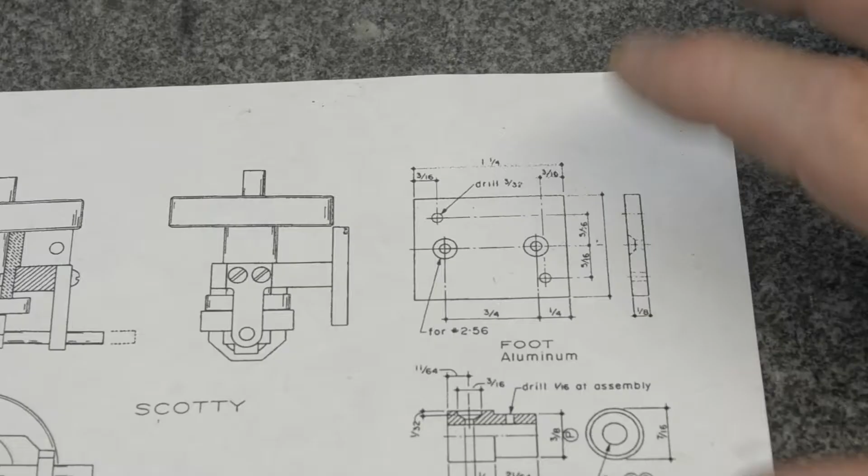Work on a little quickie here right now. Going to work on the foot. Pretty straightforward, simple piece of flat aluminum stock, 1/8 inch thick, 1 by 1 1/4 long. 4 holes, 2 of which got a slight countersink to accommodate a 2-56 flathead screw.

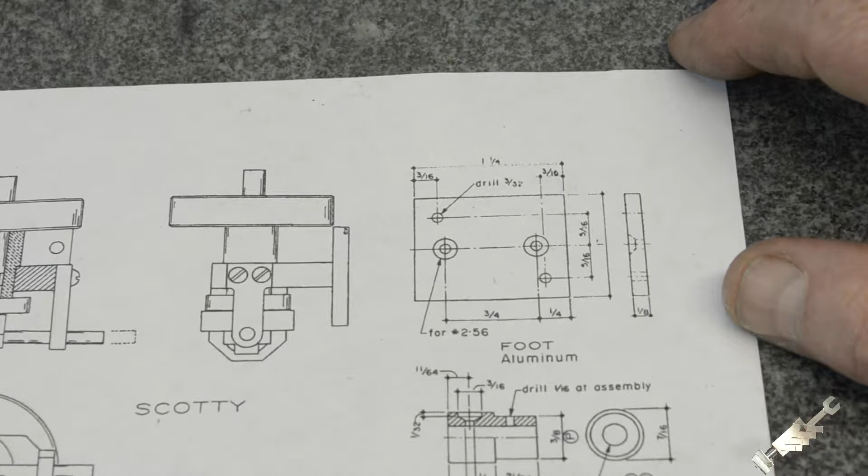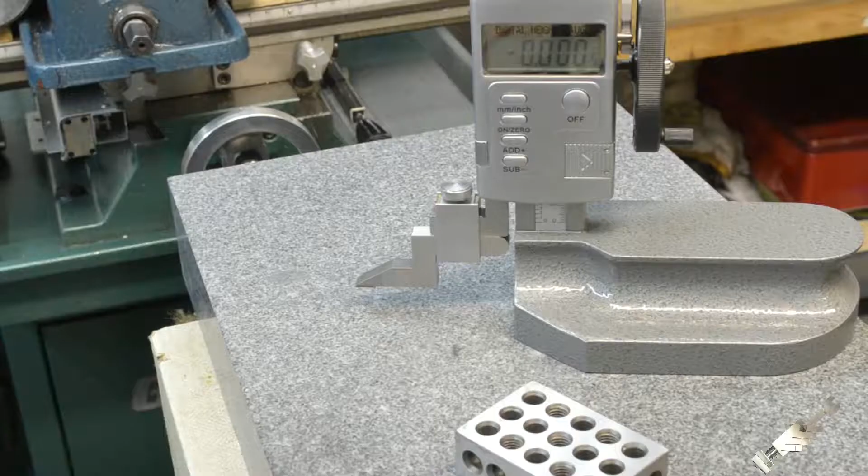And pretty simple. I'm going to lay it out with my digital height gauge, and figure it's good practice since I just got it. And so we'll get moving on this. Okay, so we're going to use my new digital height gauge to lay out the holes and the overall dimensions of the foot, which will fasten the engine frame down to a wooden base of some sort.

So before we do that, we got to make sure that it's zeroed out. So I got my surface plate nice and clean. Made sure there was no grit or dirt on the base of my height gauge. And so it's nice and clean. So let's start by zeroing it out, and you could double check it. Just got a 1-2-3 block here, and as you can see, 1 inch.

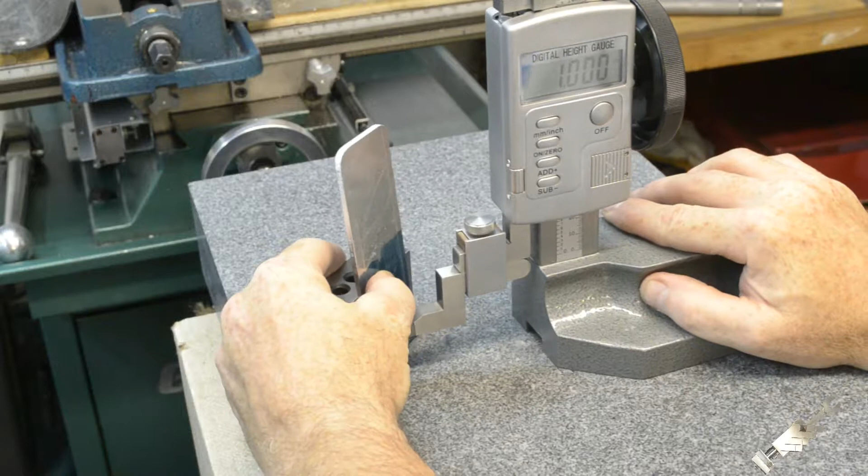So alright, we'll go ahead and I'll get my piece of material and we'll start laying out all the needed dimensions. So 1 inch. So you guys can see what I'm doing. So this will be the length of it there, and then it's going to be a length of 1 1/4. I hope I can keep this in focus here. 1.250.

It's hard doing this with one hand. Okay. And bring this back down. .250. Okay, and this here. Okay, so that'll be the overall dimensions. You gotta draw 2 holes that are on center. That'll fasten the frame to this foot. So that would be 1/2 inch. Okay.

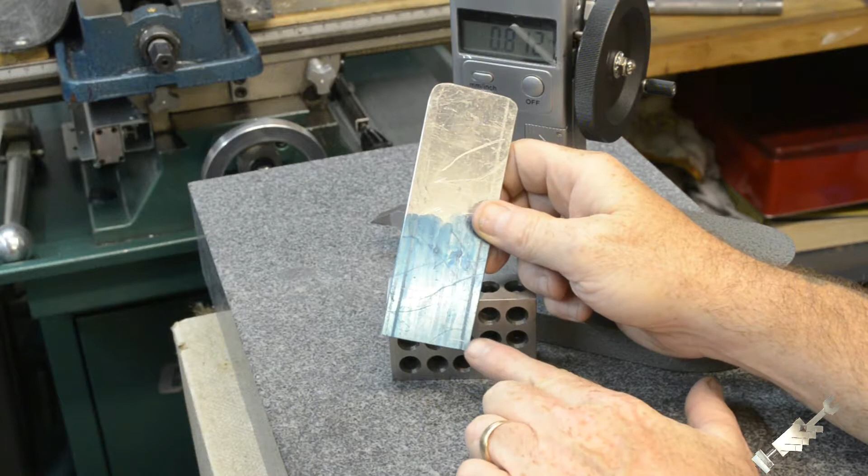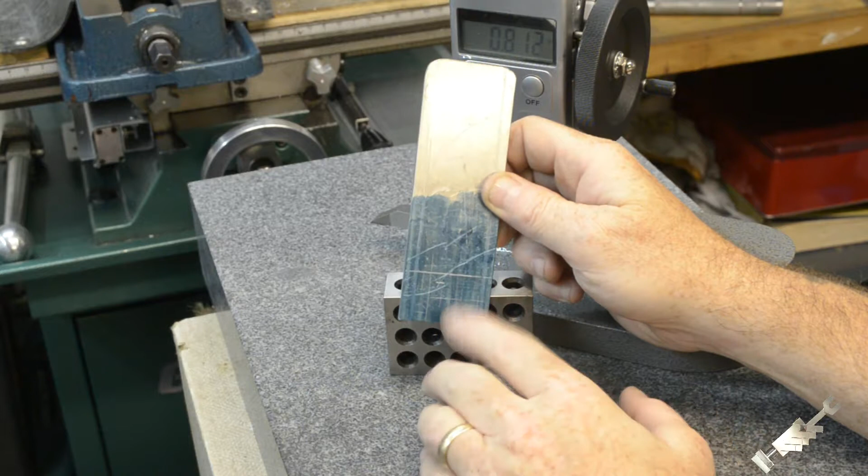So, alright, so you guys can see these 2 holes that get drilled for a 2-56 screw, and countersunk, and that'll hold this to the engine frame, and then these 2 holes here will get drilled and hold this down to a base, a piece of wood of some sort. So we'll get this cut out and drilled out.

I did a few things off camera already, just to make the video go a little quicker. I had cut the piece down to the inch by 1 1/4 inch it needs to be. Milled the cut edges down so it's nice and straight. Then what I went ahead and done is laid everything out, all my dimensions with the digital readout, so I have no calculations to do while I'm doing the operations.

There's not much material sticking above the vise jaws here, so I used the edge finder to pick up the inside edges on the vise, and used the half function on the digital readout, and that gave me the center line, and laid everything out. So I've gone ahead and center drilled all the holes. So now I'm going to come back and I'll start actually drilling the holes. So I'll put that on video.

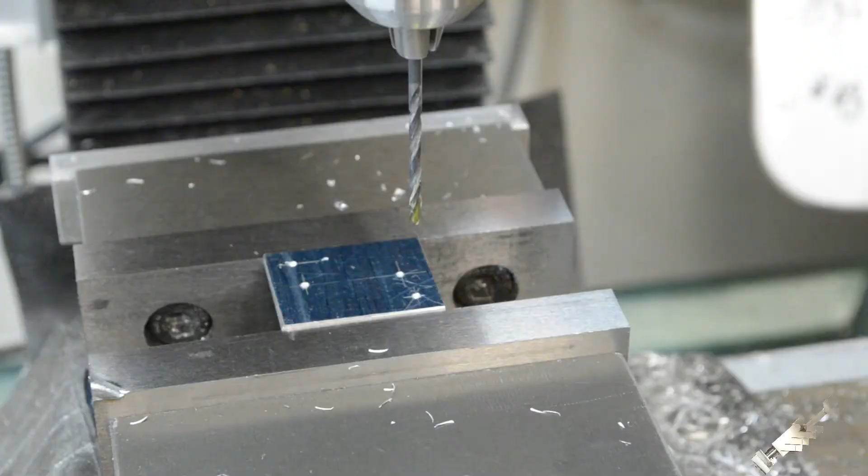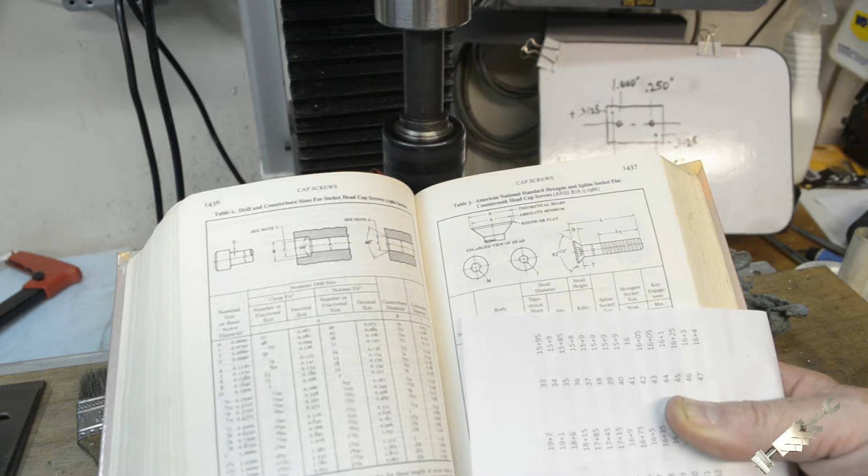I got to put a countersink for the 2-56 screws. I'm going to be using hex head flathead screws. Now, unfortunately, I didn't have any, and I had to order some, and I'm waiting for them to get shipped out. And so, well, what I'm going to do, get you guys into focus here. If I could see this, get you in a little bit tighter.

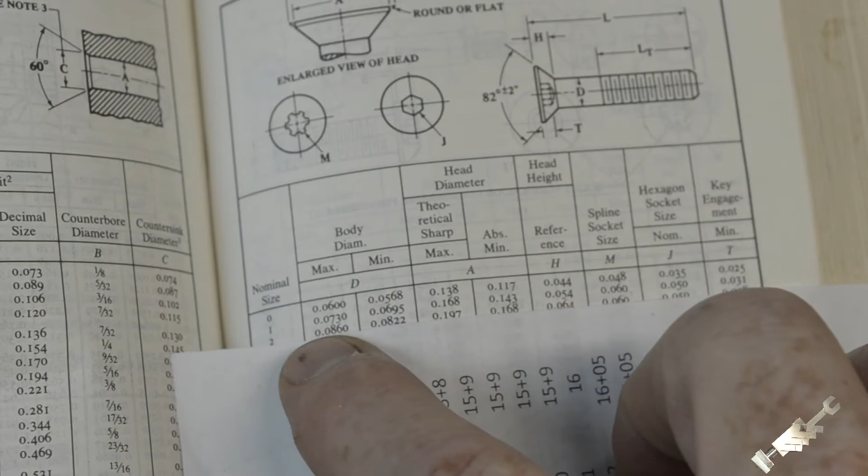Okay, so it's going to be a 2-56, and it gives you the dimension of the height of the head here, and it's 64 thousandths high. So let me show you what's going on here. So now I'm going to go down the 64 thousandths that it calls for. I'll probably give it another thousandth or two just to give it a little extra. So

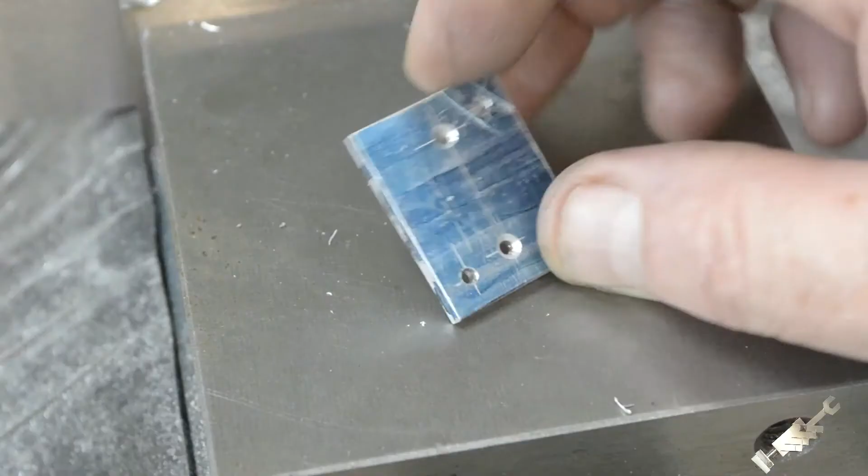The piece with the countersinks. This will be the bottom. It'll actually mount this way, and then the engine frame will sit on top with those holes there. I just took a small center drill just by hand, and I just cleaned off that edge, just a little, clean up the edge of the hole a bit. So alright, that piece is done.

One other thing is, I don't know if anybody caught that, when I started doing the countersink on this side, I had the parallels out, because when I drilled the holes, the drill bit would have hit the edge of the parallel here. So after I had gotten the piece clamped in, I took the parallels out. When I started to countersink, I noticed this was starting to push down a little bit, so I slipped the parallels back under there, and that supported the piece in the vise. So I don't know if anybody caught that or not. So just thought I'd mention that.